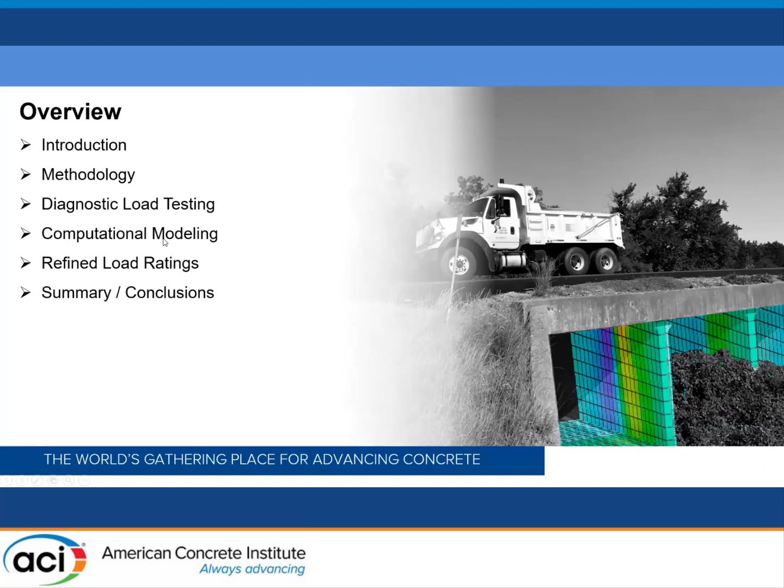Just an overview of the presentation today. We're going to go through introduction, some background material, methodology that we use, the details of our load testing and computational modeling, and how we use those to come up with the refined load rating for these culverts.

A little background on the project. TxDOT has over 19,000 bridge class culverts in their inventory, and they are classified as either single or multi-cell box culverts that can carry traffic, and they have a total clear opening of greater than 20 feet, including the thickness of the interior walls. They are part of the NBIS. They receive inspection on a routine basis, and Texas has used assigned load rating in the past for these culverts.

According to the AASHTO specification and requirements, we can use assigned load rating on the structures when the plans are available with indicated design loads, there's no need to perform load rating based on inspector determination, and none of the principal structural components of that particular structure has a condition rating below 5, or better say moderate deterioration.

However, FHWA changed their requirements recently, and they said you can only use assigned rating for in-service structures if they are designed or checked using LFD and LRFD. Well, TxDOT used allowable stress design, or ASD, up until the late 1990s for the majority of these culverts, and that causes the main challenge and issue with these culverts.

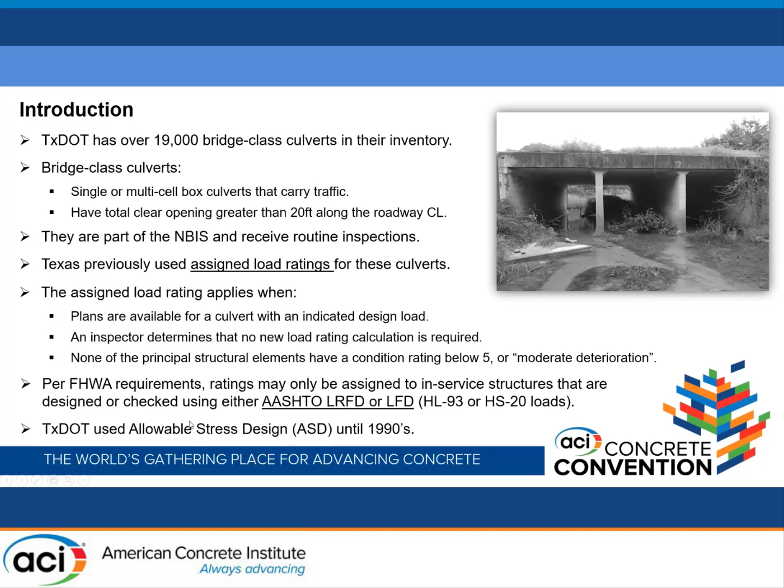They wanted to keep these culverts still open to traffic. So they selected 1,600 of those bridge class culverts. They performed load rating analysis using their in-house software called CULVLR. And load rating results for some of these culverts indicated the need for posting, where these culverts have been in service for many years, subjected to unrestricted traffic throughout their service life. They had no major sign of distress or deterioration.

In fact, some of the analysis results in the past showed that some of the culverts are failing under their own dead load, which is obviously not the case. So it was evident that some level of conservatism was involved in that previous analysis, and we suspected that could be related to the equations that were used for the live load distribution in those models, and they're usually based on the AASHTO specification. Those equations are typically just based on one parameter, fill height, and they are known to be on the conservative side. That's the whole story behind this project.

And we got this project from TxDOT, and the methodology behind it is to use a multi-step process to refine the ratings of a select group of culverts within these bridge class culverts. About 40 plus culverts were assigned to us, and our methodology involved diagnostic load testing on a population of 10 out of these 40 plus culverts, and then performing refined analysis on all of them to refine their ratings.

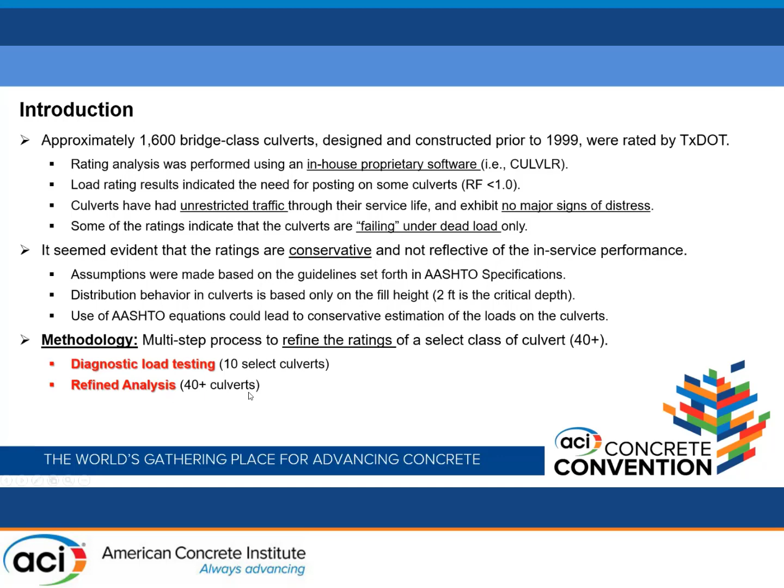Now to diagnostic load testing. As I said, we selected 10 culverts, and the goal was to understand the structural performance and the response and the load distribution behavior in these structures. So for selection of those, we had our own criteria. We looked first at different attributes that could have potential impact on the performance of these culverts, say the fill height, the culvert geometry, or the location of the culvert, because that could affect the soil properties around the culvert. We also looked into the previous load rating results, in terms of controlling rating, the failure mechanism, and the controlling section.

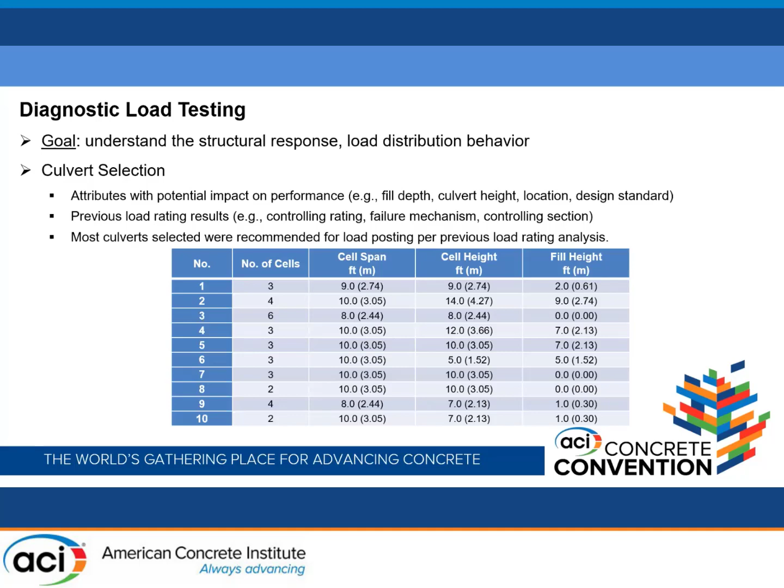We tried to select these 10 culverts for the attributes and the previous load rating results to have a wide range over all of these parameters that we considered. Also, most of these 10 culverts were recommended for load posting based on the previous load rating analysis. You can see some of the key attributes of the selected culverts that we chose for the diagnostic load testing. As far as instrumentation, we used a combination of strain gauges and displacement sensors to have a better understanding and better data collection of our 10 tested culverts.

For the strain gauges, we use gauge extensions in order to make sure that we don't have any local effects because of the concrete property, non-homogeneous composition, or surface cracks or large aggregates affecting our data collected from the field.

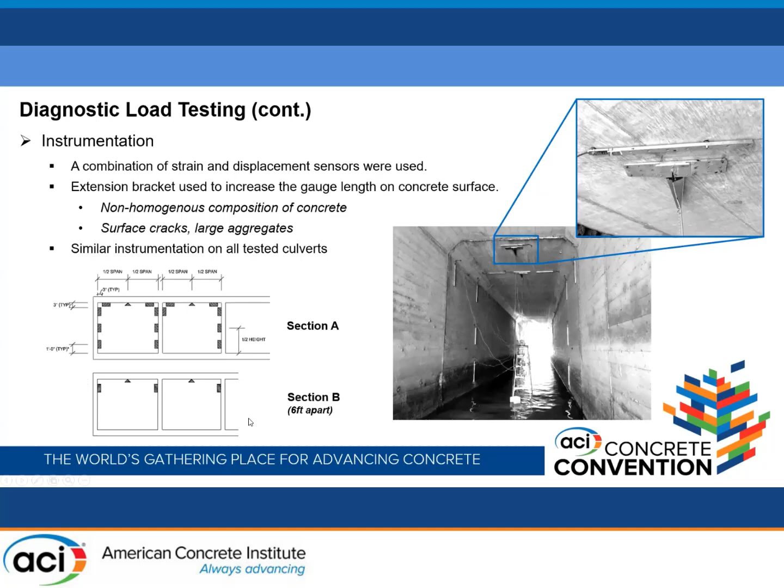As far as the instrumentation plan, we tend to keep the same instrumentation plan overall for all the 10 tested culverts. The plan was to instrument one exterior cell and one interior cell at 2 sections that are 6 feet apart. So you can see section A was relatively heavily instrumented, and it was intended to collect the maximum structural response relatively close to the application of the load. And section B, 6 feet apart, was planned to collect that distribution behavior or distribution response.

As far as testing procedure, again, a similar testing procedure was considered for all tested culverts. We used triaxle dump trucks, which were weighed and measured before each test. As far as test configuration, as you can see in this figure, we had 5 test configurations. For test 1, we line up the truck with the instrumented sections. And test 2 to test 4, we move the truck sideways to better capture that distribution throughout those 2 sections that we instrumented. And test 5 was for us to have some collected data on the 2-lane loading scenario on these culverts.

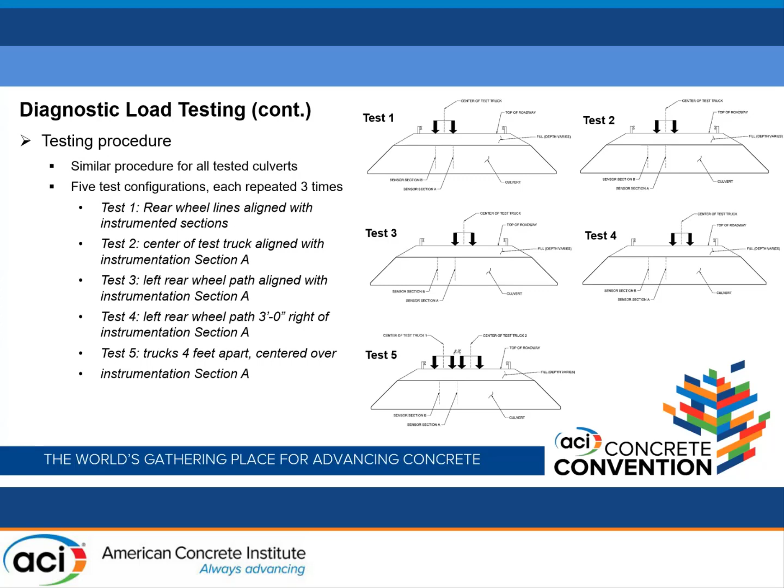For all of these tests, we performed the test at crawling speed, kind of a static test. We repeated each test 3 times to make sure that the responses are reproducible, and we monitored the collection of the data during the test. If any anomaly or unpredicted behavior was observed, we stopped the test and started over.

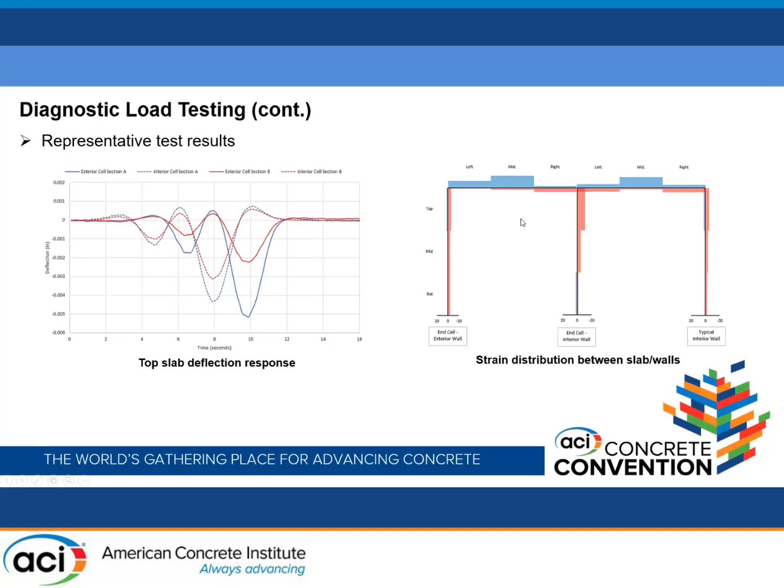These are some representative responses or data we got from our load test. On the left, you can see the deflection on the top slab for the interior and exterior cells on one of the culverts, at 2 sections, section A and section B, 6 feet apart. And on the right, you can see the strain distribution between the wall and the slab. These are the maximum responses collected from each of the strain gauges attached at the corresponding locations.

The second part of this project was the computational modeling, or the finite element modeling, for refined analysis. Again, the goal here was, number one, to leverage our modeling to supplement the load testing program to help us have a better understanding of load distribution behavior in these culverts. And number two, use and leverage these models to perform a refined analysis and get more realistic rating factors for these culverts.

In order to define the boundary of the soil to be modeled in these 2D models, and the pattern and density of the mesh, we performed a mesh sensitivity analysis. The goal was to optimize our mesh in order to balance the efficiency of the model and our analytical effort with the accuracy of the results.

Initially, we used the material properties based on plans or previous ratings, and we changed that later on during the process based on calibration, which we'll get to in the next few slides. Initially, we also performed the analysis on the dead load and live load, and we looked into several parameters, including, for example, the deflection pattern, just as a sanity check to make sure that the model is acting the way that we expected it to.

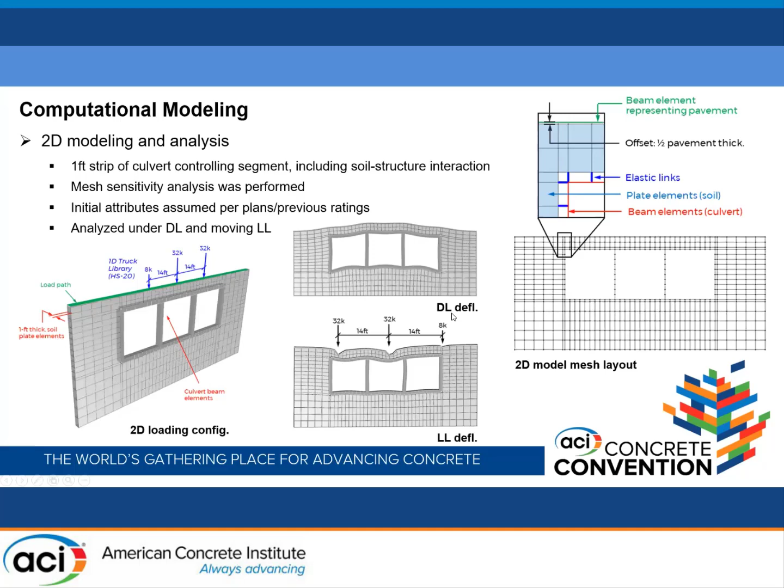Then the next type of modeling, or level of modeling, was the 3D modeling to create the full 3D representation of these culverts and use that 3D model basically for our calibration, comparison to the load test results, and do a calibration. We used the mesh pattern that was already optimized in our 2D models as a cross section, and then we extruded that mesh throughout the length to create that full geometry.

Obviously, when you go to the 3D model, we had to use different types of elements. For instance, we had to switch from plate elements to 3D brick elements or solid elements to model that soil around the culvert. Now we had to use plate elements for the culvert and the pavement, but the interaction part was still modeled through those links. And all of these models were created in LARSA 4D.

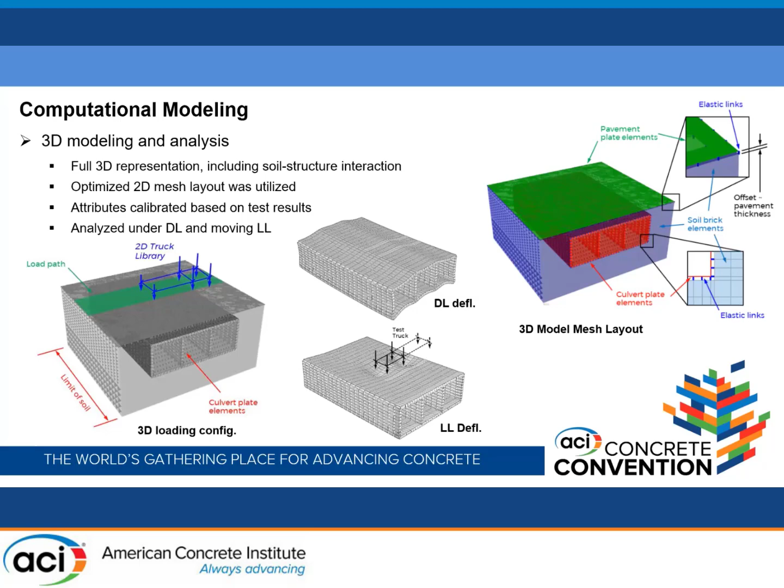Again, the initial attributes for the preliminary analysis were taken from the previous ratings or the plans, but we changed those properties, as we're going to talk about during the calibration process. Again, as a sanity check, you can see the model was analyzed. This representative model of one of the culverts was analyzed under dead load and live load, and you can see the deflection pattern on this specific model.

Then moving on to the calibration. So the goal here was to make sure that the 3D model that we created could mimic the results that we got from the test. So we actually modeled the similar truck with the same configuration, with the same loads as far as the axle weight, and we ran it using influence surface analysis on the models.

And we started changing different attributes in the model as far as the boundary conditions and material properties for different components, within a reasonable range of those materials that we expected to be accurate. And we did this in an iterative way until we got the closest possible match, a reasonable match between the response out of the model, both deflection and strain distribution, and the data we got from the test.

Here the graph down below shows the iteration process between different models. For example, for this case, you have to go to model 15 in order to get a good match with the test result, and have to do the iteration until we converge basically to the test result. So once we have a 3D model calibrated, it is expected that that 3D model is the best representation of the actual behavior of the system in service.

But use of 3D analysis and 3D models is not the most efficient way to perform load rating on these culverts. The common practice is to use 2D models. Number one, because these models take time to create. Number two, they take a lot of time to analyze and post-process, converting all the plate stresses into effective moments and shear for load rating analysis.

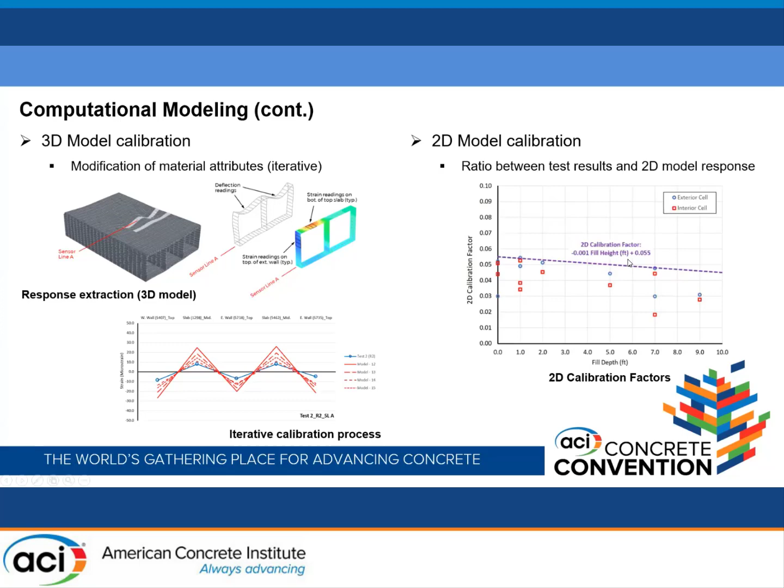Using that equation, we can apply that to the full amount of load or the demands in the 2D model, and that's basically mimicking the actual three-dimensional behavior. However, in order to make sure that you're not losing any aspect of the three-dimensionality and the actual distribution of the loads, we did also another phase, which was a 2D-3D correlation study.

So basically, the goal was to make sure that we achieve a reasonable agreement between the deflection response that we collected in the field, what we predicted with the calibrated 3D models, and also the 2D models having the calibrated attributes plus the 2D calibration factor.

So out of 10, we selected 3 culverts with different fill heights: no fill, 2 feet of fill, and 7 feet of fill. And as you can see, we did perform this comparison. Across the board, deflections out of the test and the 2 different models in the 2D and 3D environment are very close to each other. One pattern that you can see is as you get to the higher fills, your 2D response would be a little bit on the higher side compared to the test, which is on the conservative side. And we are okay with that.

Plus, we didn't have a major problem with the low rating of the culverts with the high fill, because when you get to the higher fills, you usually tend to distribute the live loads very well across the length of the culverts. So you don't usually encounter low ratings. It's usually the culverts with the shallower fill or no fill that have problems as far as low rating under the different types of legal and design vehicles.

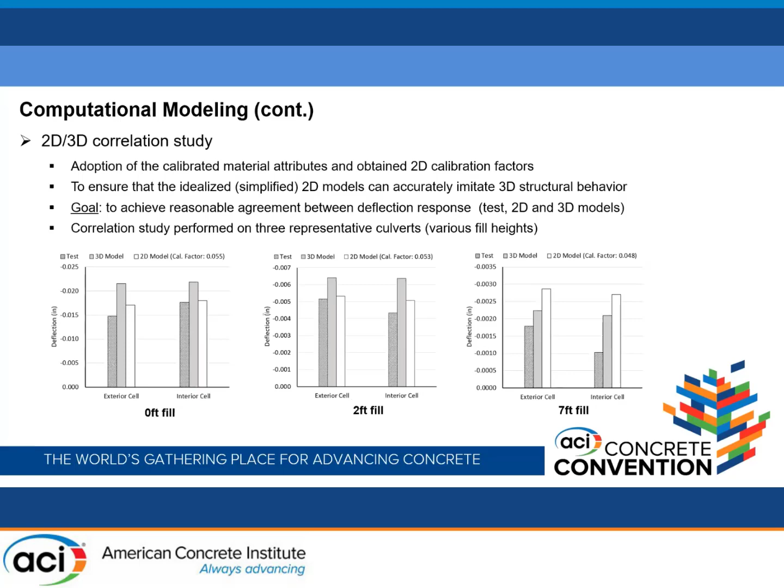So now that we have our 2D models calibrated, 3D models calibrated, we have those attributes, we have a 2D calibration factor. We created the 2D models for all the 40+ culverts that we had. And we used those 2D models to create the load demands for us under dead load and live loads. As far as capacity calculations and the load rating analysis itself, we followed LFR or LFD methodology based on AASHTO MBE. We had to do all of those calculations as post-processing in a series of custom Excel spreadsheets.

Applicable factors such as load factor, impact factor, multiple presence, or I think they call it intensity reduction factor in the LFD code, are all defined based on the AASHTO equations inside our custom spreadsheet for load rating analysis. When it gets to the analysis, we use multi-step elastic analysis to capture progressive hinging. So stage one, we perform the initial load rating by assuming 100% flexural fixity between all the walls and slab. They're all capable of transferring moments to each other.

If you get a low rating at the operating level for any of the design or legal vehicles, then we went into stage two and we place plastic hinges at the locations where there is no reinforcement per plans, or the reinforcement has not enough development to provide the desired capacity. And then we redo the analysis. If we still get the rating below 1 at the operating level, we place the plastic hinge or release the moment at the location that had the lowest rating or caused the low rating.

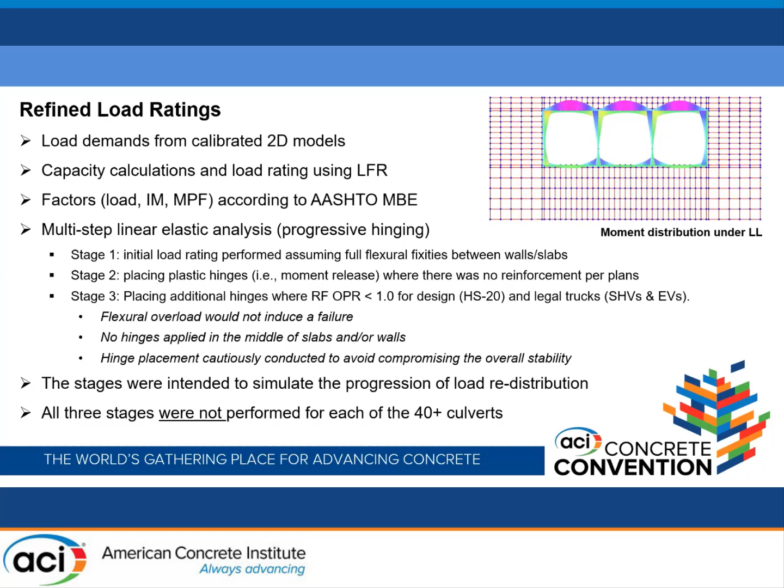And number two, when we're placing the hinges, we were monitoring the state of stresses in those plate elements and also the level of forces in those links that are providing the structure-soil interaction, to make sure that none of those goes into tension. So the stages were basically intended to simulate the progression of the load redistribution along different components of the culverts. And I should mention that we did not have to use all 3 stages for all the culverts. In some cases, we had to go to stage 3 to get the realistic load rating.

So here are some representative results of the refined ratings that we got out of our analysis procedure. You can see across the board, we were able to increase the ratings. These are just for HS20, inventory and operating. In some cases, the improvement was significant, and those are usually the culverts that have a higher fill height on top because they tend to have better distribution.

Looking at the results and all the procedure, we are very confident in the procedure that we had and the results that we got, because the majority of these culverts, especially within this select group of 40 plus that were assigned to us, were close to interstate or on the interstate system, and they have seen and experienced the same level of loads as the SHVs or emergency vehicles in the past during their service life. And yet the recent inspection reports and photos don't show any significant deterioration or distress, and they've been in service without any problem for their entire service life.

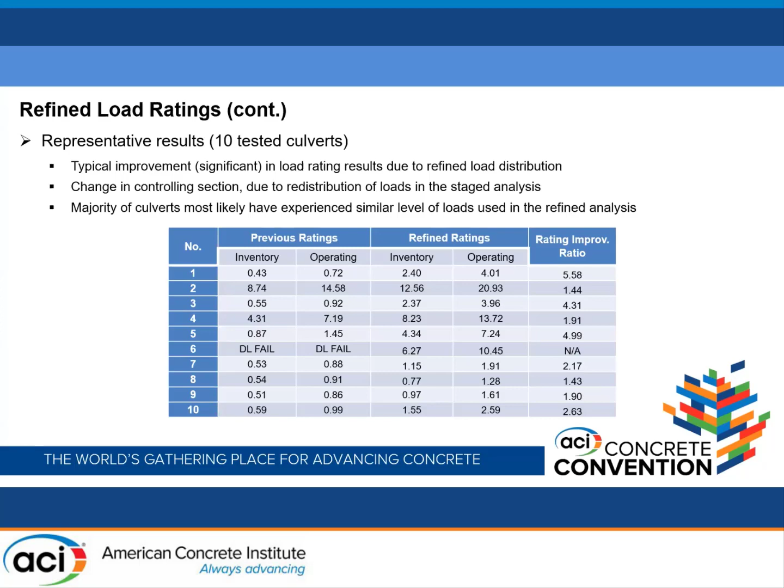So just getting to the summary and conclusion, the project focused on refinement of the load rating of an inventory of in-service bridge class culverts in Texas. They were designed and constructed prior to 1999 using the allowable stress design method. Majority of them, as I said, have been carrying unrestricted traffic for many years without any sign of distress, and some of them received low rating in the previous load rating analysis.

The project that we conducted included a multi-step process that involved both load testing and refined analysis to have a better understanding of the actual in-service performance and load distribution behavior. And we came up with the refined analytical approach to refine the ratings of these and potentially avoid posting on these culverts. Again, a select group of culverts were tested.

We used 3D finite element for the calibration of the attributes. Also, we used 2D models with the calibrated attributes to come up with the refined ratings and used a multi-step linear elastic analysis for the refinement of the ratings.

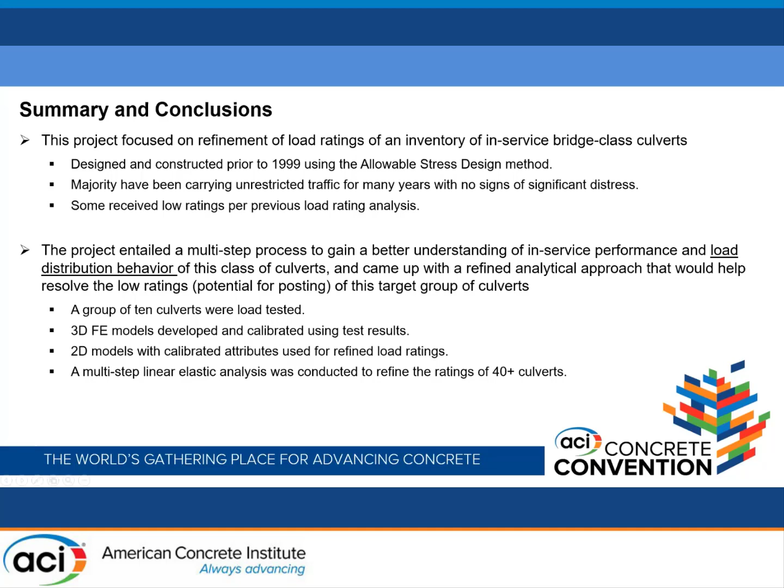The analysis seems like it was predominantly done on the load distribution, though it seems like low rating of culverts is an issue due to lack of as-built plan sets and material properties. Did the culverts evaluated in this study have as-built plans? And does the study indicate that CULVERT, which is a software, is over-conservative?

Majority of the culverts that we had, yes, we had the plans. That's how we got the information as far as the reinforcement and the material properties for our capacity calculations. There are some instances that you may not have plans, and that's a different story. We're not claiming that CULVERT necessarily is over-conservative. It's just that it uses the AASHTO equations that can be conservative for some culverts with some geometries.

It's the fact that the equation in AASHTO is using basically the fill height as the major contributor in the load distribution behavior. What we found in this study based on our load test is it's not only the fill height, but a suite of attributes. There's the skew angle, the geometry of the culvert, the soil properties. They're all playing a role in the load distribution characteristics. So using that 2D calibration factor equation, we tried to bring those all in to have a better understanding of how loads are being distributed.